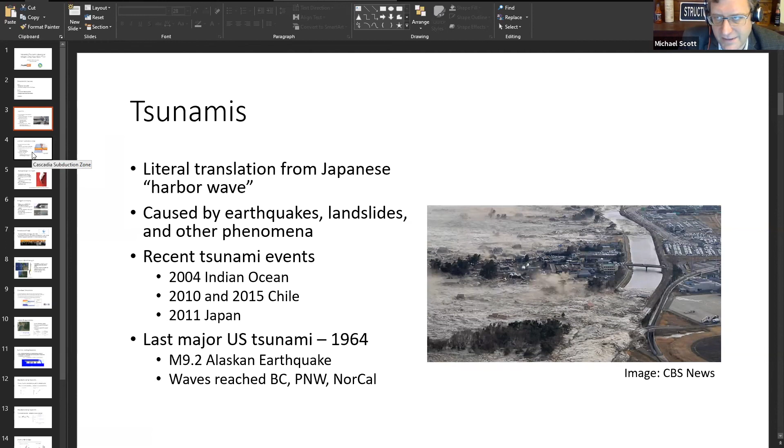The last major U.S. tsunami was in 1964. This is from the magnitude 9.2 Alaskan earthquake, where waves reached British Columbia, Pacific Northwest, as well as Northern California. So these recent tsunami events have really brought tsunamis into the forefront.

So in terms of the Pacific Northwest, we're faced with the threat of the Cascadia subduction zone, which is less than 100 miles off the coastline, and it's caused by subduction of the Juan de Fuca plate. There's potential for long duration earthquakes, 3 to 5 minutes of ground shaking, followed 20 to 40 minutes later by a tsunami, which could be up to 30 feet high and over half a mile of inundation on the coast.

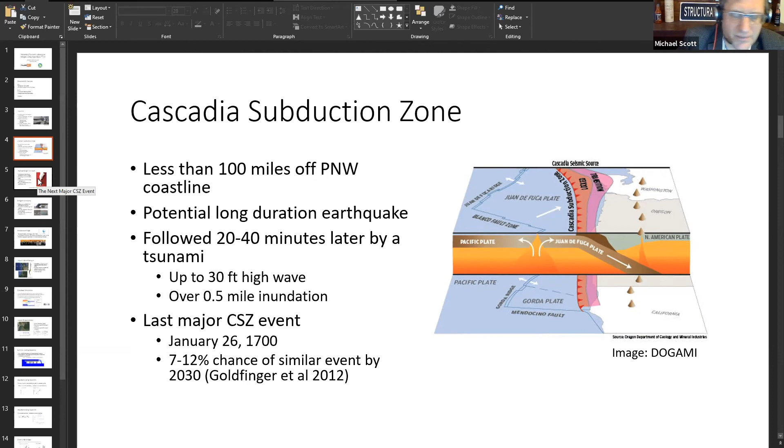Based on written records as well as geologic data, turbidite history, the last major CSZ event was in January of 1700. These are written records from Japan of orphan waves, as well as sampling of turbidites on the Oregon coast. And based on history going back before 1700, there's about a 10% chance of a similar event happening by 2030. So definitely a clear and present danger, as they say.

This was all brought into the forefront by, of all things, a New Yorker magazine article in 2015 called The Really Big One, describing how this could potentially be the worst natural disaster in modern U.S. history when there is another major CSZ event. And basically, quoting the article, everything west of I-5 will be toast.

This is due in large part because in Oregon, before 1974, there was no seismic design code. Much of the critical infrastructure was built before 1974. Of course, the interstate boom was in the 1950s. Lots of buildings were built before 1974. But again, this article really stressed the potential impact of a CSZ event.

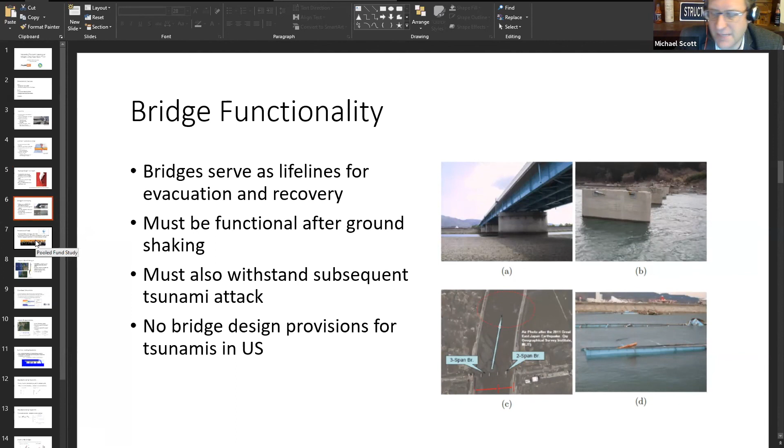So focusing on bridges: bridges serve as lifelines for evacuation and recovery during and after an earthquake and tsunami event. Of course, bridges must be functional after ground shaking, but they also need to withstand subsequent tsunami attack. Currently there are no bridge design provisions for tsunamis in the U.S. There are some for hurricane-type storm waves, but tsunami waves are quite different, similar but different in many ways.

The objective of that pooled fund study was to develop a design guide specification for tsunami loading on bridges, which is what I'll give a high-level overview of in the rest of this part one of our presentation. To develop the design specs, you have to know what the hazard is.

So probabilistic hazard analysis done by Pat Lynett, University of Southern California, almost said University of South Carolina. I'm from North Carolina, but it slipped out.

Southern California, as well as Hong Kie Thio, one of his collaborators, developed, based on probabilistic analyses of triggering events all around the Pacific, the maximum credible flow height and flow speed that we can expect at different grid locations along the coast of Oregon, California, Washington, Alaska, and Hawaii. These grids are modeling open shallow water flow around the Pacific, so you can't get too refined. The grid sizes were between 10 and 60 meters.

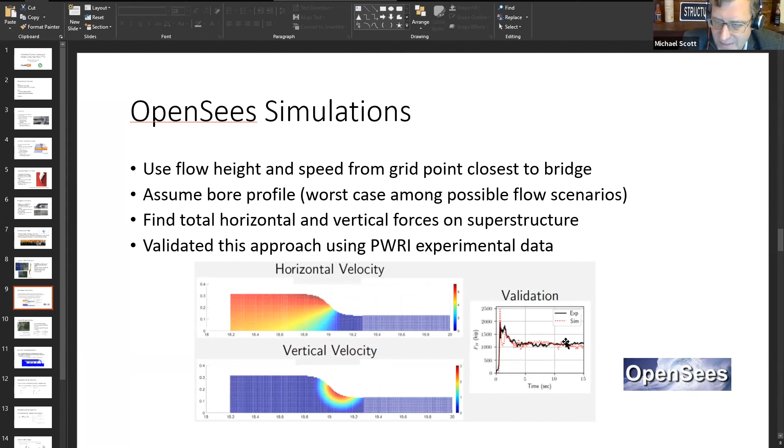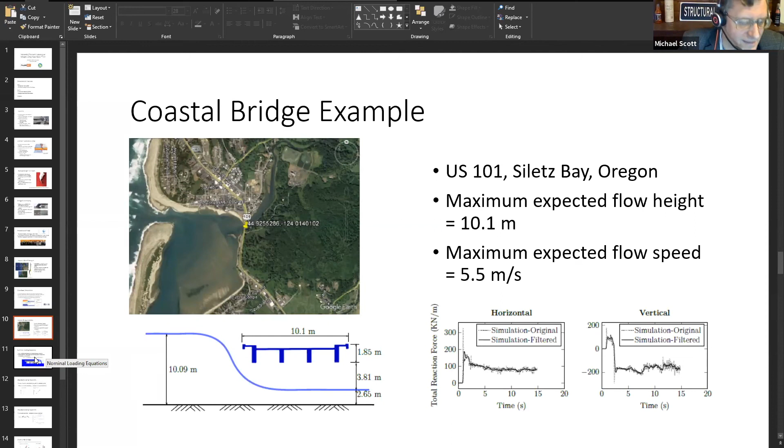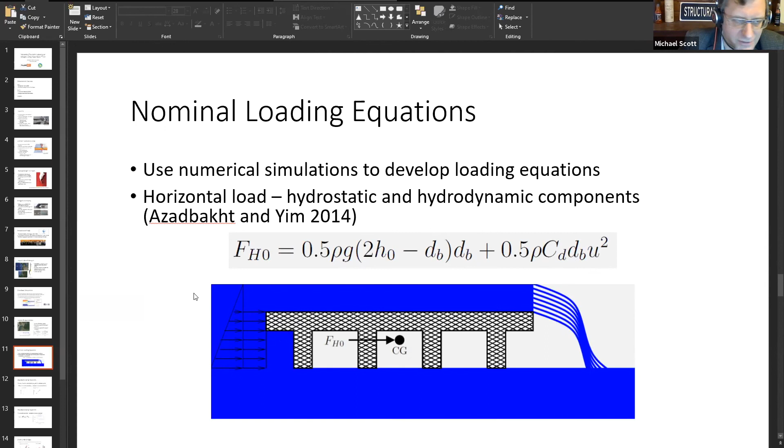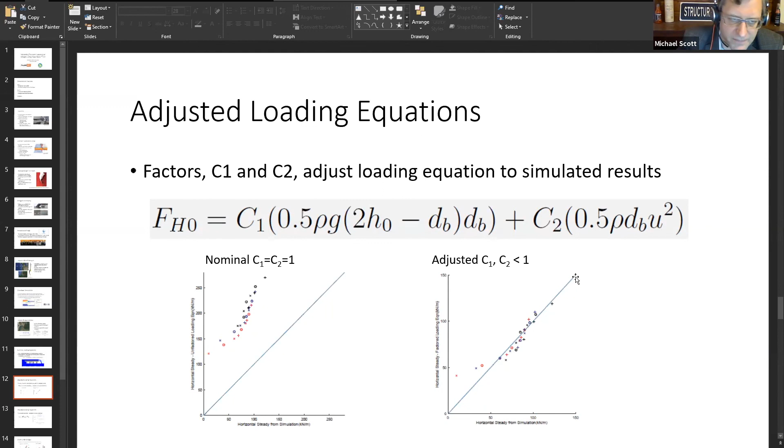So we can adjust these factors C1 and C2 through regression, to bring these points down onto this 1-1 line, shown in blue. And also, noting that the steady state force is relatively easy to determine compared to impact, we then used regression again to relate the steady state force to the impact force. So this peak impact force, the very transient type loading, to the more steady state constant force after impact.

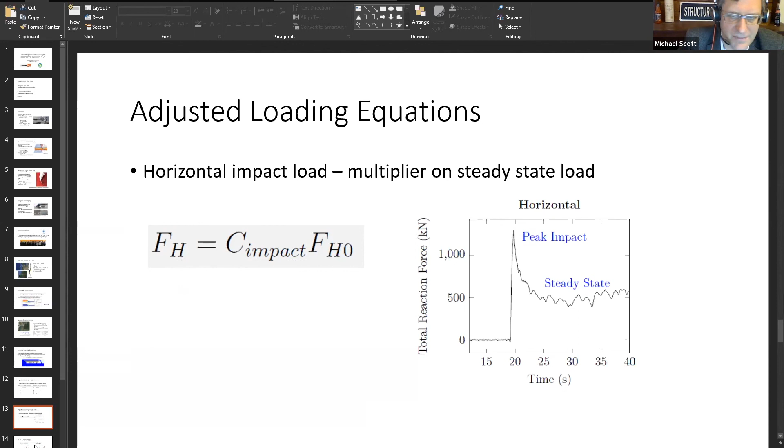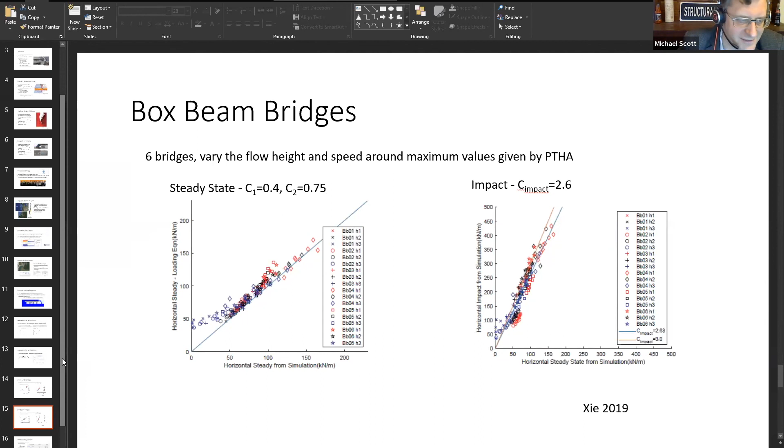More details on this process are given in the PhD dissertation by Zhonglang Xie from 2019 here at Oregon State. For box beam bridges, a different type of superstructure, we found different coefficients for the static and dynamic terms, and a different coefficient for the impact term as well. All based on regression analysis, and we're still tweaking these factors a little, but there's many other things to consider.

Not every bridge is straight or perfectly flat with respect to flow, so there's other factors for bridge geometry that we account for, like skew, slope, and super elevation, as well as factors for small debris, and completely separate load cases for large debris, think shipping containers or vehicles striking a bridge. Also substructure analysis on the piers, geotechnical considerations for scour, and uplift and downward forces. These draft design specifications are under review by AASHTO T3 and T5 currently.

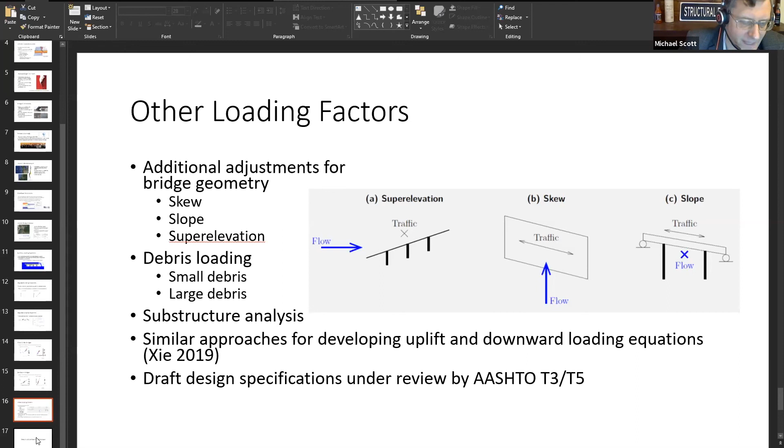So that's a pretty glossy overview of the loading equations, and now I'm going to turn it over to Minjie, who will give some details on OpenSees PFEM, the particle finite element method within OpenSees, and how we use that to do fluid structure interaction. So I'm going to stop share and hand it over to Minjie.

Hello everyone. I'm Minjie. In the second part, I will focus on the numerical simulation of the tsunami loading on bridges, and show how to do it actually in OpenSees.

So first, I want to give a very brief introduction to OpenSeesPy, a Python interpreter of OpenSees. So first, with OpenSeesPy, we actually bring OpenSees to the Python community. So if you're already a Python user, it natively runs with other Python packages, your Python programs.

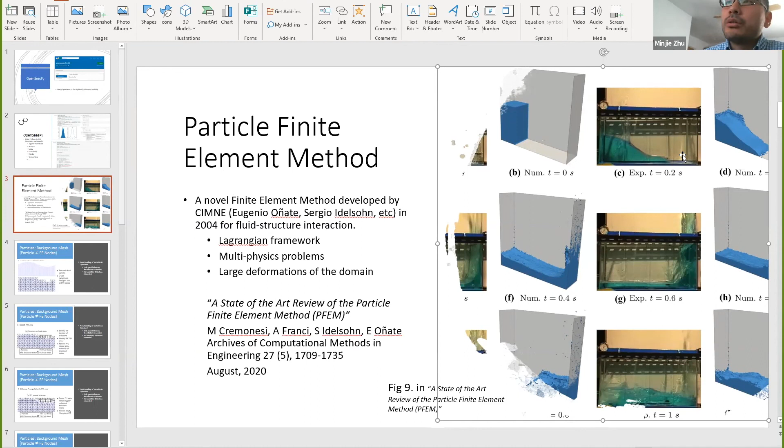It also aims at solving multi-physics problems and large deformations of the domain. So all these features are very suitable for our problems, tsunami loading on bridges. There's a recent paper reviewing the method published this year in August by the authors of the PFEM. And at the right, this figure actually is from this paper. It shows a classic dam break problem and comparisons with the experiments. And actually, I will show the same simulation in OpenSees.

But before that, I want to mention another, not feature, but aspect of the PFEM in OpenSees. So in OpenSees, we mostly implement all the features of the PFEM, but we have a new handling of the particles that is different to the traditional PFEM. So traditionally, PFEM assumes particles equal the finite element nodes. So each node of the fluid is a particle, so it can move freely. But the problem is, if you have a large number of particles, your model just grows dramatically, and it's just overkill for the total performance. And you have to do global Delaunay tessellations. You just kill the performance.

So in OpenSees, we create a so-called background mesh. So we separate the concept of particles and finite element nodes. So now we can have a set of fluid particles, and from those particles, we can create background cells or a background mesh for the fluid. So we only need to do local Delaunay tessellation, and no boundary detection is needed. The next slides just quickly go through this method.

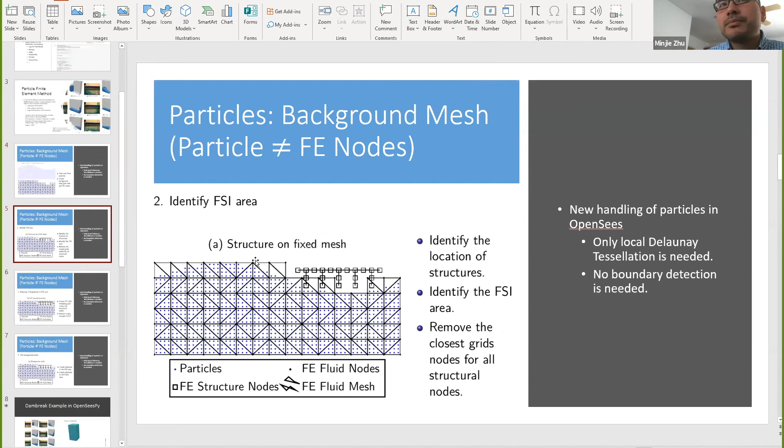So first, we have a bunch of fluid particles defined. Then we create a background mesh. Then we put our structures on this mesh. We identify the locations of the structure. Then we do a local Delaunay triangulation just around the structure. And lastly, we remove the empty triangles around the structure. And the background mesh is finally created. This method we find is very efficient and fast to couple the structures and the particles.

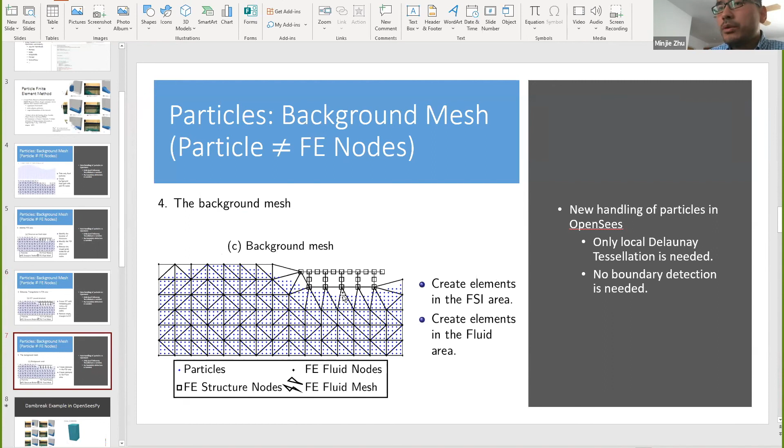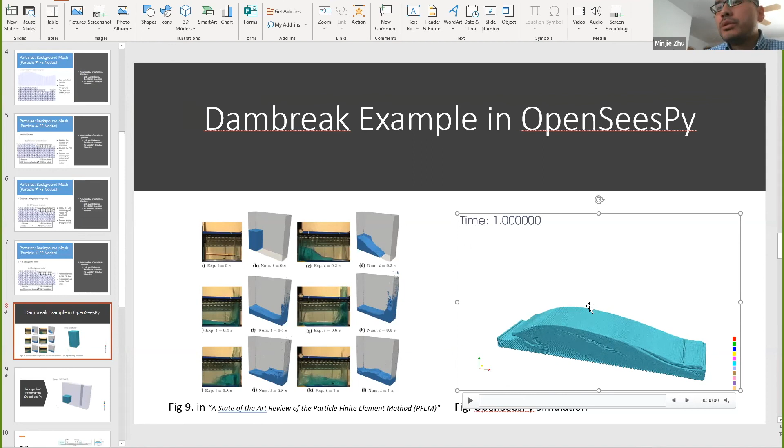And here's the dam break example. So again, on the left is the figure from that review paper of the PFEM. And on the right is our implementation in OpenSees. As you can compare this to the left, with the background mesh, the fluid domain is actually more smooth. So we get smoother results, because you can see on the left, in the traditional PFEM, we have a lot of splashing of water. These water particles just flying out is even more splashy than the experiments. So the background mesh really helps to reduce the oscillation of the results.

And here's another example. This is another water column hitting a bridge pier, and we put a gate here. So when the gate moves up, the water comes down. So this is the animation of the interaction. You can see the water particles hit the pier.

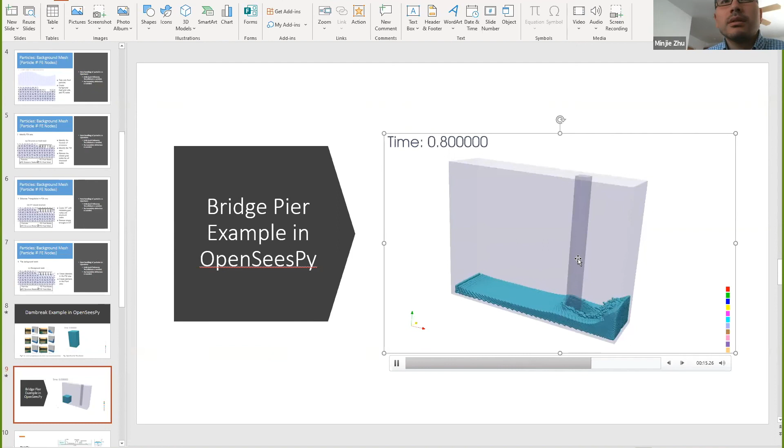Yep. And now I want to focus on this PWRI experiment and its modeling in OpenSeesPy. I will go through a breakdown of the scripts, how we do it, how we get the results, and compare with the experimental data.

So the experiment setup is like this. You have a water tank, standing water, and the bridge superstructure, and wave gauges right before the bridge. And this is another direction look at the model. So the bridge is actually the same length wise as the wave flume, so it's basically a 2D problem. So we run it in 2D.

And the data collected are pressures on the bridge, on the top, beneath it and the front, and also the horizontal and vertical reactions recorded from the bridge. And this is the dimensions of the bridge.

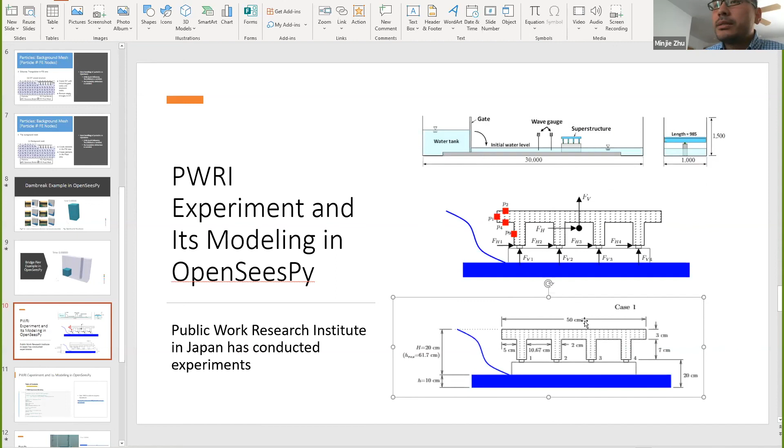The tool we use is called the Jupyter Notebook. We basically write our code in scripts in the Jupyter Notebook and run it, and then we can post-process it. So now I'm gonna leave this PowerPoint and open the link of the Jupyter Notebook.

So if you take a quick look at the notebook, we have different cells of code, and we also put the pictures here. It helps us or you when you're developing your model. So now I'll just go through a very quick rundown of this code, to give you an idea how we do this, and you also can do it.

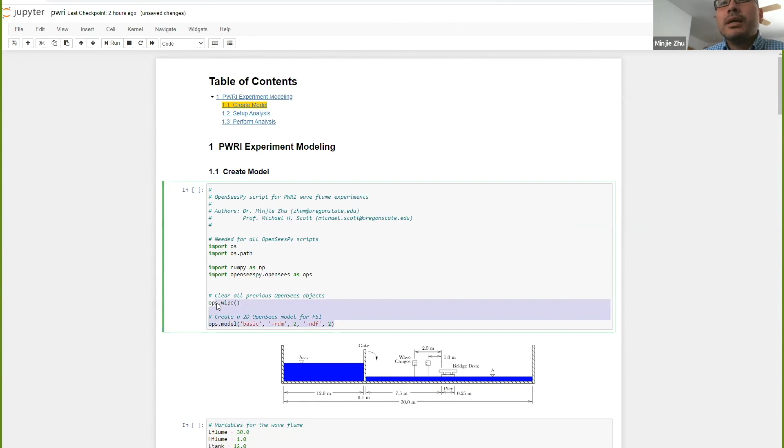So the first is to create a model. That's the model we wanted to create. Water is created as particles. The bridge is a regular OpenSees structure, and these walls are fixed boundaries. If you used OpenSees before, you're probably familiar with this wipe and model. And you also import some packages, of course OpenSeesPy and a few others.

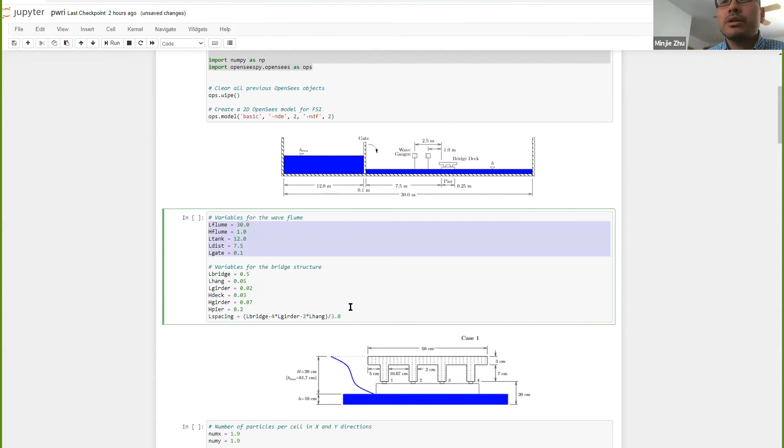Then based on the dimensions, we create variables for the wave flume and variables for the bridge structure. And this part is the parameters or properties for the fluid: density, viscosity; and structure properties: density, elastic modulus, Poisson coefficient, and mass.

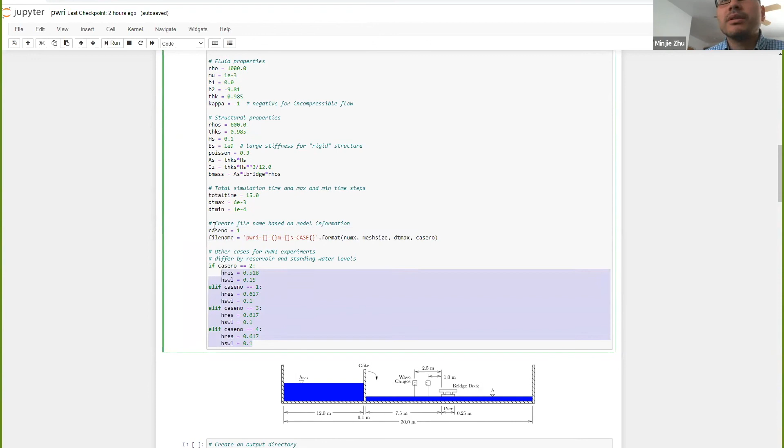And we want to run a total of 15 seconds, and the simulation time step is between 0.006 seconds and 10 to the negative 4 seconds. And for this example, we run case 1. This experiment has different cases. Different cases have different reservoir and standing water heights. So this is only for case 1.

So in this part, we first define a recorder. You probably already know the node recorder and element recorder in OpenSees, but this is a new recorder called the background PVD recorder. It just saves all model information to a PVD file, and then we can open it in ParaView.

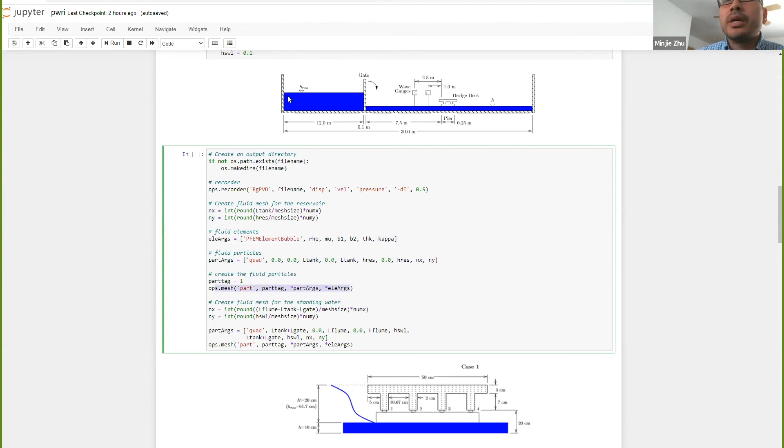And also OpenSees implements a new method called mesh. It takes several geometric parameters and meshes the domain, like solid mesh, line mesh, and here we do the particle mesh. So I give it the fluid elements I want to use, the shape of the water in the reservoir, and I mesh it so it will create all the particles as the reservoir. And this will create the particles for the standing water. So now we have the particles created.

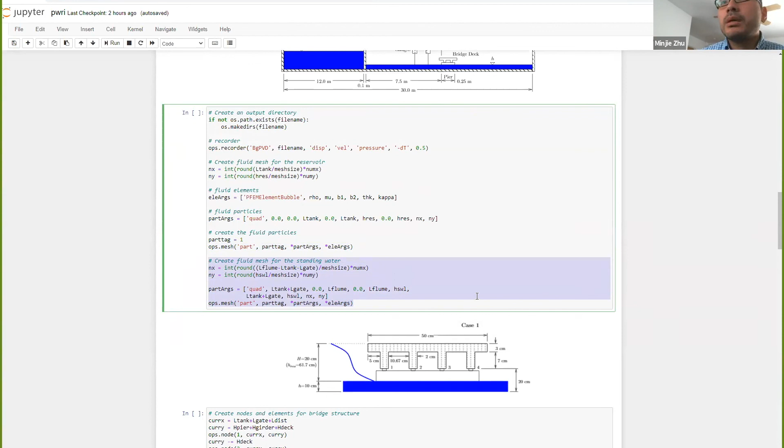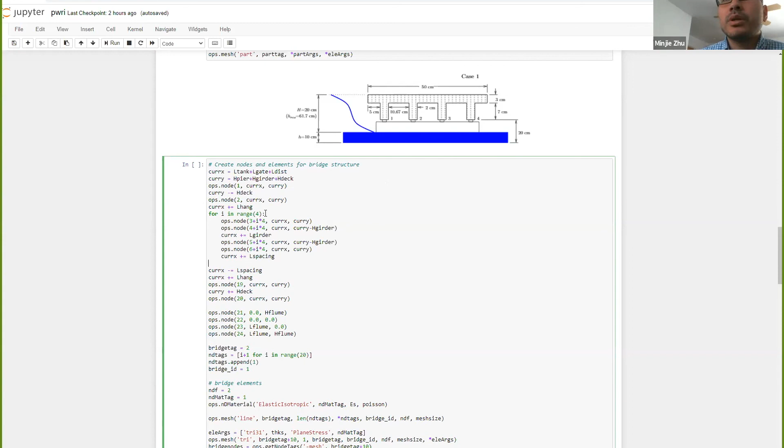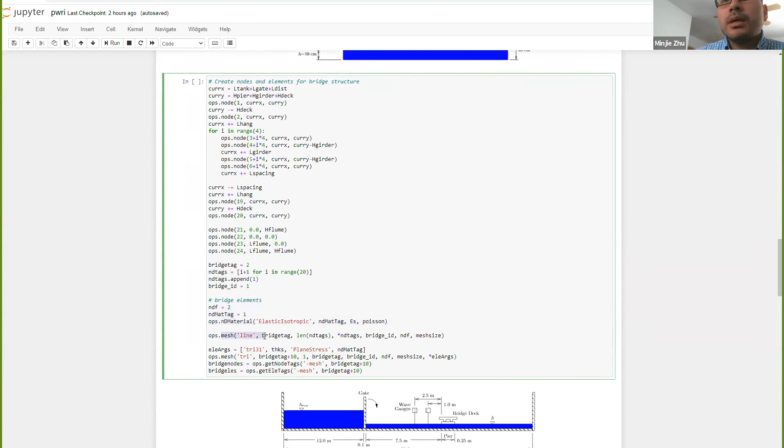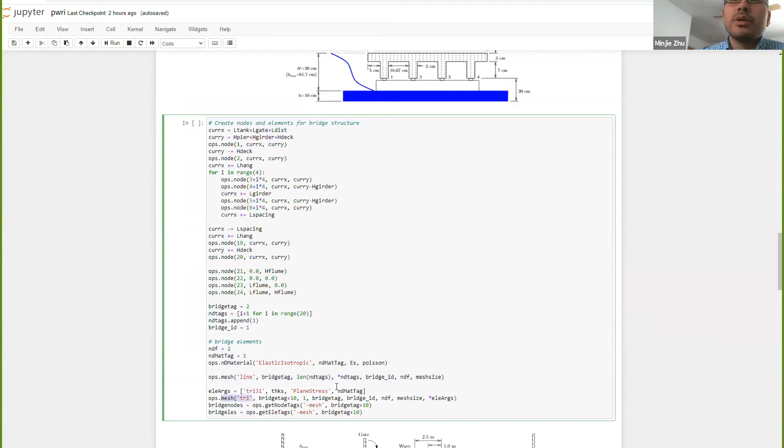Then we need to create the structure model. This is a very typical, regular structure model in OpenSees. Create a bunch of boundary nodes of the structure, the structure material, and mesh line means I mesh all the boundary lines of the bridge. And with the boundaries, I do another mesh. It creates tri31 elements of the structure.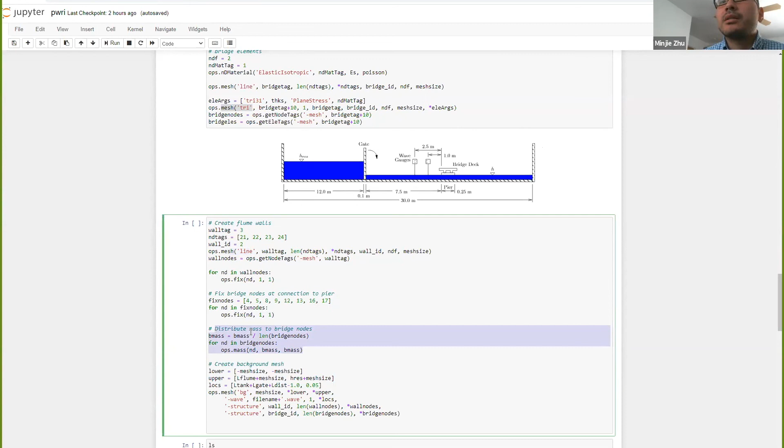And the last step for modeling is to create the walls, the flume walls. I also use the mesh line, create the wall nodes, and I fix the nodes. I add mass to the structure.

And the final step is to create the background mesh. Remember in the last few slides, we have particles, we have the structure model; then the background mesh combines the particles and the structure model all together, and creates the fluid-structure interaction model.

So with the Jupyter Notebook, I have the scripts, then I can run it. So here I just go to cell, run all above. So I run all above cells. It takes 2 to 3 minutes to run because I'm running in a virtual machine. So you see the stars here, that means it's running. As it's running, I will just go down and explain this analysis part.

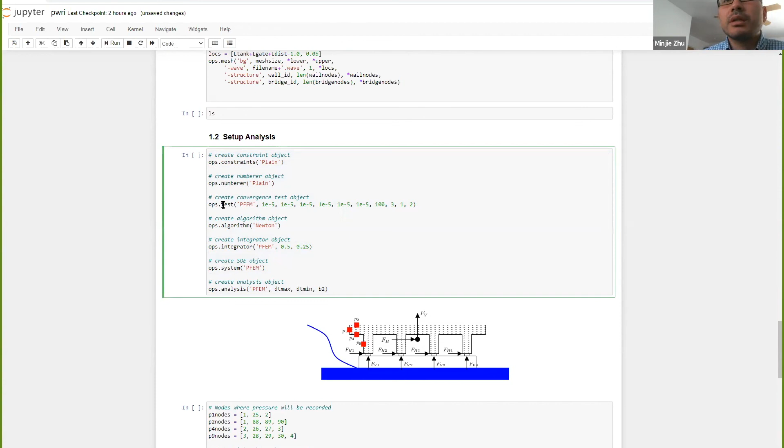So first we set up the analysis like the normal OpenSees analysis. We have constraints, numberer, tests. So a few analysis options are PFEM specific, like this test, convergence test for PFEM. Usually we do like residual test or unbalanced force test, but here we need test for both velocity and pressures, so we have different tolerances for them.

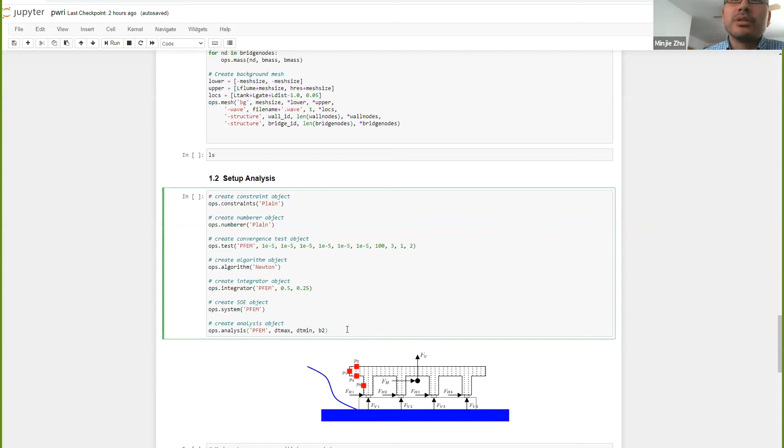And this PFEM integrator is actually a Newmark integrator, but it's different because it takes velocity and pressures as the primary unknowns. And this PFEM system is the solver for solving the coupled FSI system. And this analysis is a dynamic analysis, but it takes the maximum and minimum time step we want, and also does a couple other things to make sure the PFEM is running good.

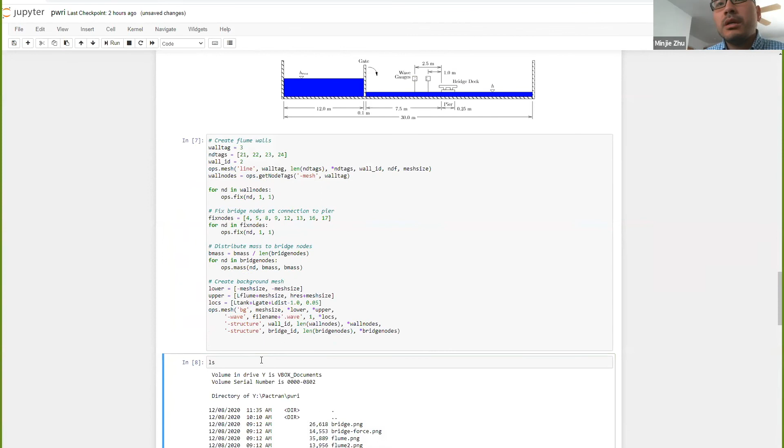Okay, so now this model is created. If we list this directory, we see a couple files are created. One of the files is called the .pvd file. So now I'm gonna just stop the sharing here, and I will go to ParaView. So this is ParaView. I will open this file I just created.

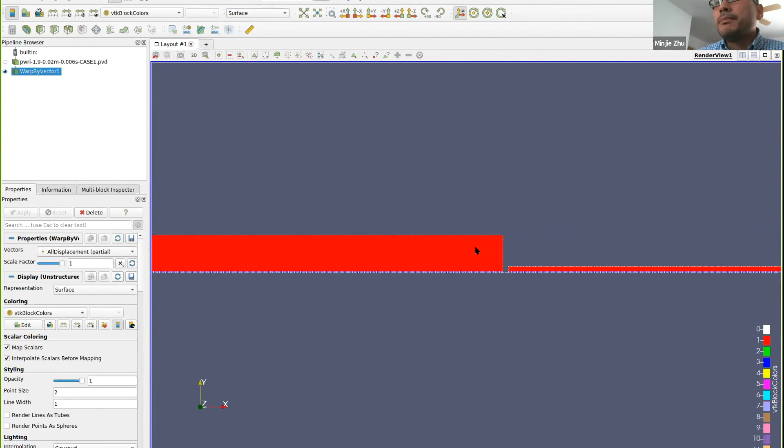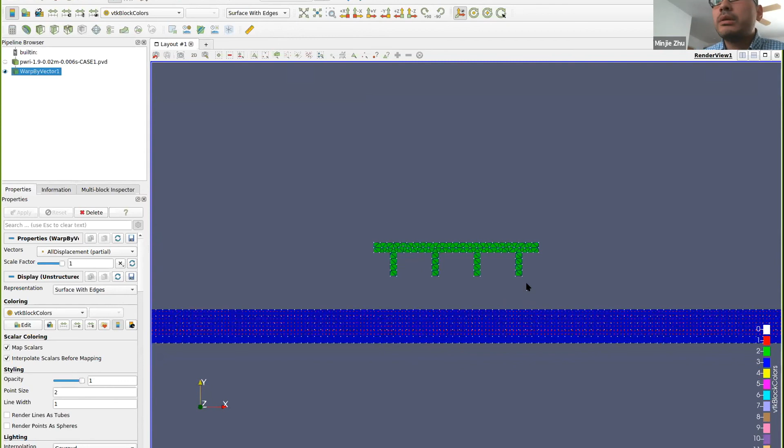So this is the model we just created. So that's the reservoir. If we look closer, you can see the red dots are the particles and the white dots are the background nodes. So we have the water tank, we have the standing water, and our bridge is here, meshed with the Tri31 elements. So usually what I do is I create a model and view it in ParaView. If I'm fine with the model, then I just keep going with the analysis. So let me go back to the notebook.

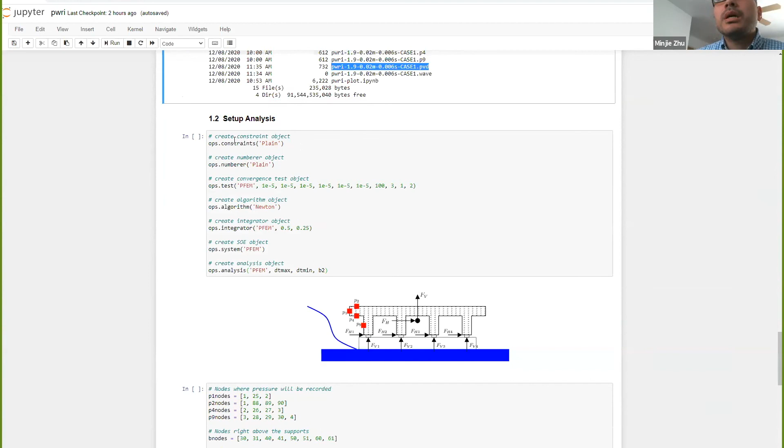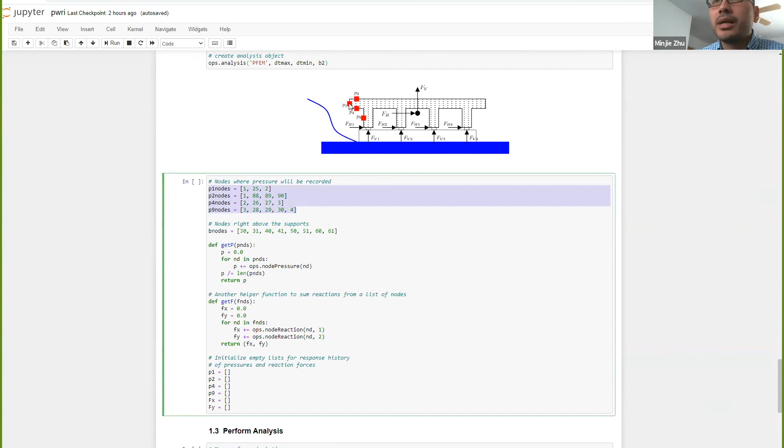Okay, so now we have set up the analysis. Then the next thing is to get results. The results we want to look at are pressures at the same locations as the experiments and total reactions. Since we don't know exactly the location they measured the pressures, we just get a few pressures from the nodes around that location and do an average. So I define Python functions to get the pressures, and another Python function to get the reactions. Then I create an empty list for the response history of the pressures and reactions.

And now I can just start performing the analysis. The analysis is in a while loop. While my current time has not reached the total time, I do analysis. So for PFEM, we do one step at a time because we need to update the background mesh, the particles, and move them to the new position. So every time we do one step and we do a remesh, and between them we calculate the reactions and append the pressures and the reactions to my list. And at the end, I save all my data to the files.

I can run it here. So I stopped here, so now I just run all below. It will run everything below. So you can see running starts and it just goes step by step. Since we need to go to 15 seconds, it takes a while to run. I think we don't have time to run here, so I will just stop here and show some results I have run. Okay, let me stop it here, and I head back to my presentation.

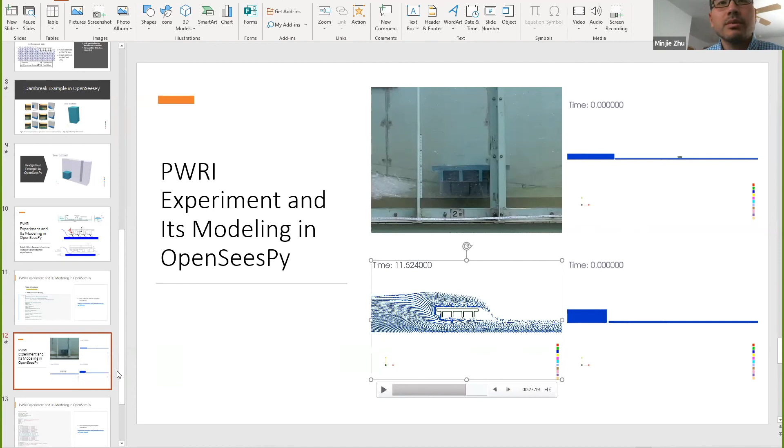We also want to see the comparisons quantitatively. To post-process the results, we also used Jupyter Notebook. So here I created another notebook just to plot the results. I can also open it. Okay, so this is another notebook to do all the post-processing. So first I load all output data, just load these reactions and pressures.

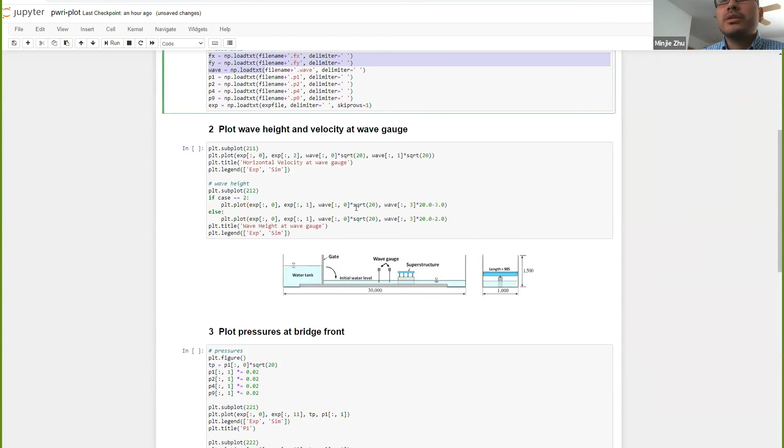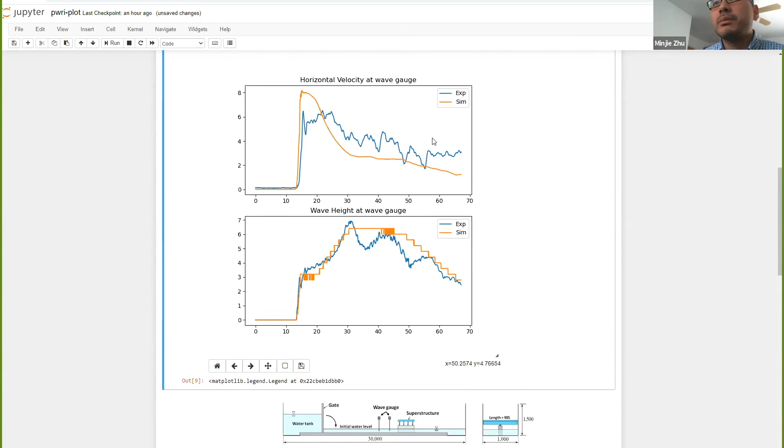And the first thing to compare is the wave height and velocities at the wave gauge. I think it's this one, this wave gauge. And we use matplotlib to plot the results and make it larger. So this is the wave velocity at this gauge, and this is the wave height at the location. Comparison between experiment and simulation. And we also want to plot pressures at these 4 locations.

To plot here, make it larger. So I can zoom in here. You can see our simulation results are more oscillating than the experiment's results. As I have said, background mesh already gives smoother results than the traditional PFEM, but it's still very oscillating because that's the nature of the problem.

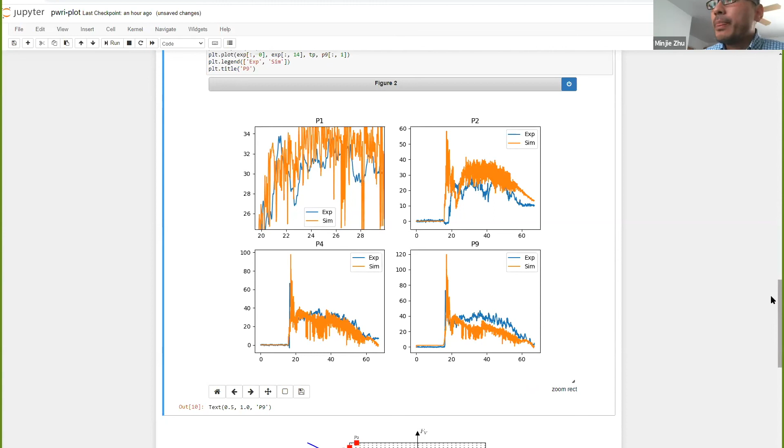You have very highly changing domain, very complicated interaction between the fluid and the structure. So you do get these oscillations. And the experiment data are more smooth because the data is filtered with, I think, a 10 hertz filter. So okay, that's for the pressure.

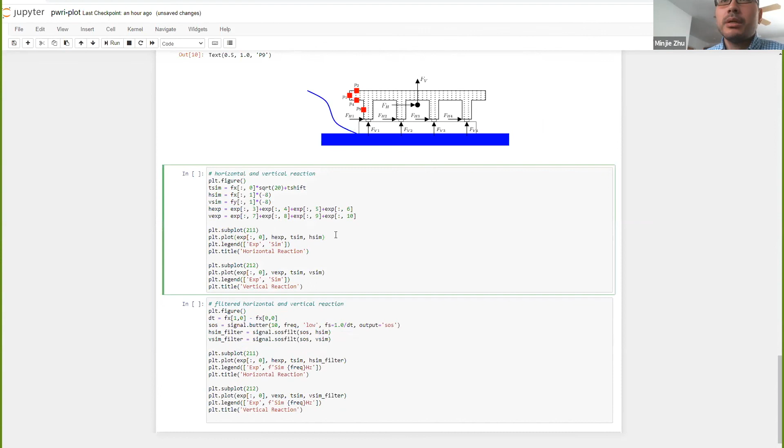And we also compare the reactions. So this is the horizontal and vertical reactions comparison. See, the simulation is also more oscillating. And lastly, we do filtered results with 10 hertz. So now you can see that the results are much closer to the experimental data.

Okay, in summary, PFEM is a fairly new CFD approach. So it's very suitable for modeling tsunamis with traditional structures in structural engineering. And the coupling we've done is very strong. We strongly couple the compatibility and the continuity at the interface.

And OpenSeesPy can run this combined tsunami and structure analysis with all existing structure models. Whatever model you want to use, you create your model, and you can add the particles and add the fluid, and then you can run the analysis. With this tool, we can run many numerical simulations with different configurations, geometries, and materials.